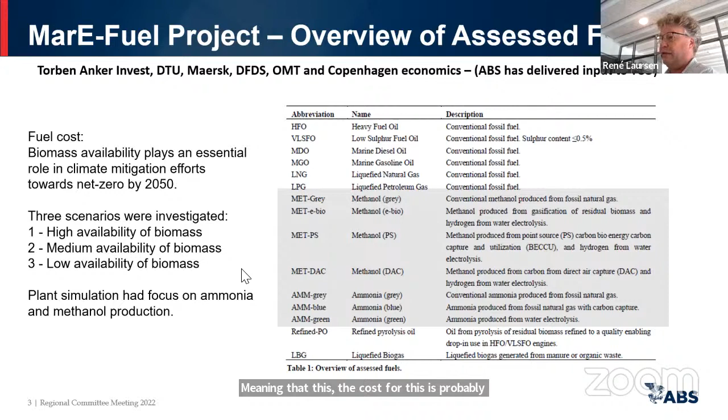Production of renewable energy was placed at 4 different locations in order to investigate how that impacts the fuel cost. Sizing of the renewable plant for production is very critical when it comes to renewable energy and the cost for that energy.

So therefore, there were some criteria that had to be in place in order to find a cheap and good location for production of renewable energy.

The ideal place comprises all of these parts: high wind resources, high solar resources, access to a port, access to fresh water, and a large area of land that doesn't cost much, because to produce sufficient energy for these fuels you need quite big areas of land. So it's important that these land areas are fairly cheap.

It was identified that 4 locations - in Chile, which has a big desert area close to the sea where all these facilities were in place, and also in southern Australia and in Western Africa. We also found wind maps and solar maps for those areas, and used those to establish an optimized design for renewable production.

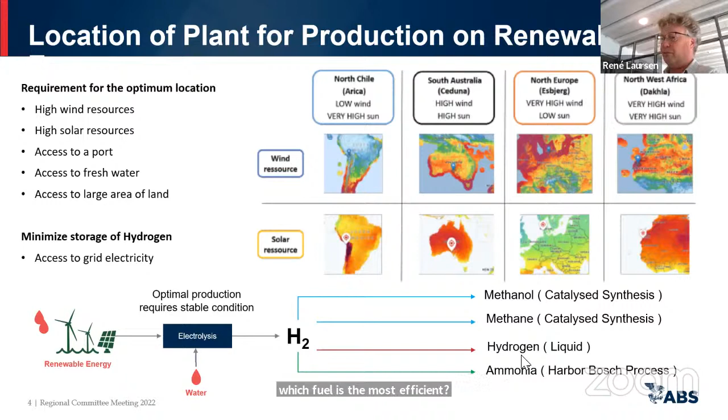Methanol and ammonia have a tendency to reduce in price as production scales up, and they are fairly dependent on the cost of electricity. The bigger the scale of electricity production, the lower the price of the fuel you will get.

So the expectation is that those fuels will rise in value over time. By 2050, it is estimated these fuels will be 2 to 3 times higher in price than ammonia and methanol type fuels. But over the full period, there's no chance that these new fuels will actually reach the same level as the fossil fuel.

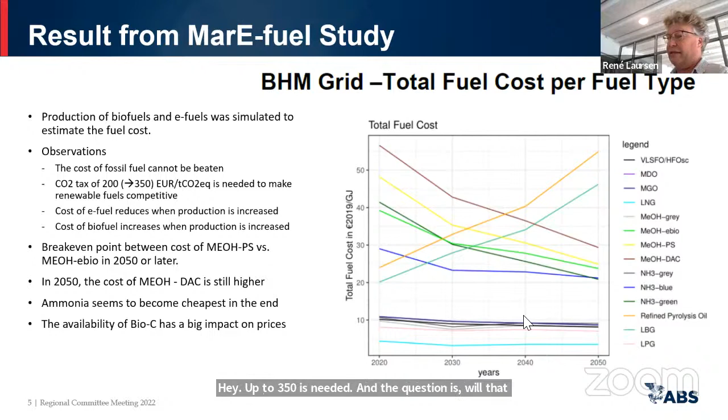It was found that a tax of a minimum 200 euro per ton of CO2 is needed in order to make those competitive. If you're looking at fuel to fuel competitiveness, up to 350 is needed. The question is, will that be a taxation that can be applied in the future? I don't know, it's a big question.

One thing is the fuel cost. Another thing is if you're having a ship operating on these new fuels, you will also need to do modification on the ship, and that has a cost impact also. So we looked at container ships, bulk carriers, different ship types to see what is the impact of installing this equipment, and then we make a total cost of ownership model for the ships to see what is the impact here.

Here we have the fossil fuels in the bottom, these are the straight line, and then we have biomethane, and we have ammonia and methanol going in this direction as we saw before. But it's still seen that there is a big deviation, even though we apply a taxation here of 25 euro per ton of CO2, there is actually a big gap between the fossil fuels and the cost for operating those ships. We need a taxation of around 300 euros per ton before these new fuels will be competitive, and this is simply because there is added cost on the ship to consider as well as the fuel cost.

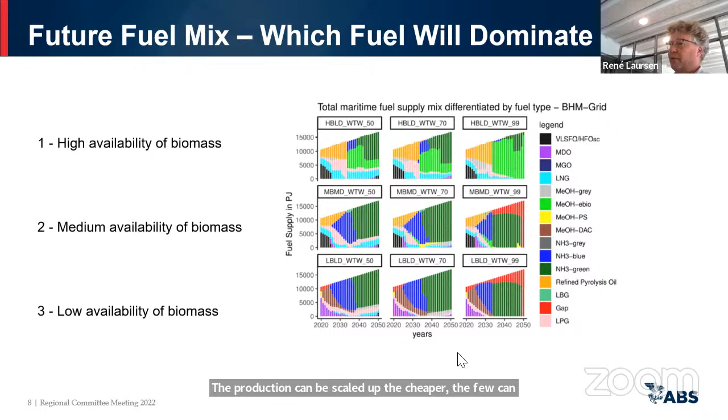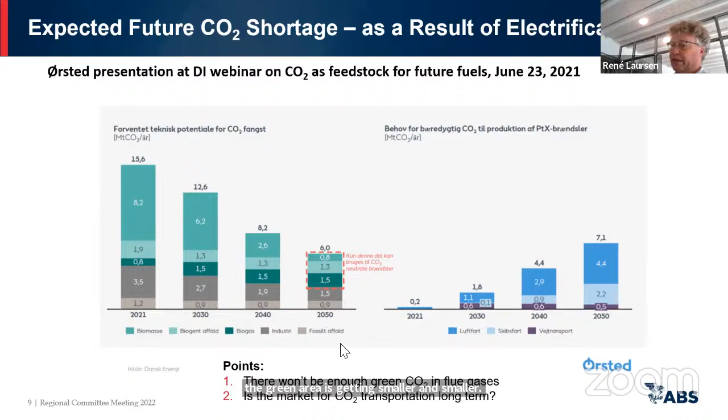Another indication here, this is from Ørsted. They have made an estimate on how much biomass and biocarbon there could be from carbon capture systems in the future. They believe very much in electrification, and believe that this is ramping up because it's the cheapest way to produce electricity, cheaper than using fossil fuel, from wind power and solar power. So we will not see any new power plant coming up using fossil fuel instead of renewable fuels. So they expect this will decline over time, and the amount of biocarbon will be less and less over time. You can see here the amount of biocarbon represented by the green area is getting smaller and smaller over time, also indicating that biomass will be a limited source for the future.

Another project also mentioned by Eduardo that we are participating in is making reports about the use of new fuels in shipping. We have so far completed one report about ammonia and one about biofuel. Those reports are available if you go to the EMSA site under publications, and then those reports can be downloaded. These are quite heavy reports, it's 300 to 400 pages with information about the use of ammonia in shipping.

What is covered in those reports is listed here on the left side: the availability of the fuel, the sustainability of how it's produced, the suitability where we're looking at engine and fuel cell technologies available in the market and how they can adapt those new fuels. Then we look at the total cost of ownership for different ship types. We also have a section about the regulation and what is needed to be changed in order to adapt those new types of fuel. And finally, we conclude with a risk assessment done for different ship types, both for ammonia and for biofuel.

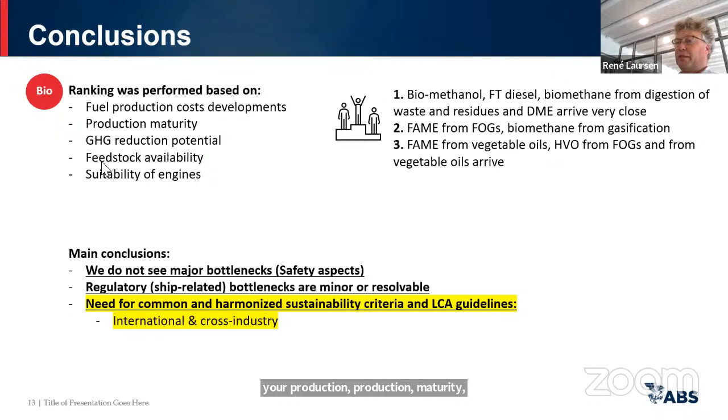We also ranked the different biofuels in order to see what makes most sense in shipping. Here we see that methanol also arrived on the top level together with Fischer-Tropsch diesel and biomethane. We compared it on these different elements: fuel production, production maturity, greenhouse gas potential, availability of feedstock, and suitability in engines and fuel cells.

The report about ammonia concluded that if you look at the announced production amount, today there's been produced 235 million tons of ammonia. And if you look at the announced production quantities, it's 133 million tons of ammonia expected in 2030, which is a significant scale up of production. This is simply the energy sector in Japan driving this uptake of new production facilities. The production methods for producing ammonia are well known - it's the Haber-Bosch process, which has been optimized over the last 40 years.

Electrolyzer is also known for turning electricity into renewable hydrogen that can be used for production. The unknown here is to scale it up to the quantity which is needed.

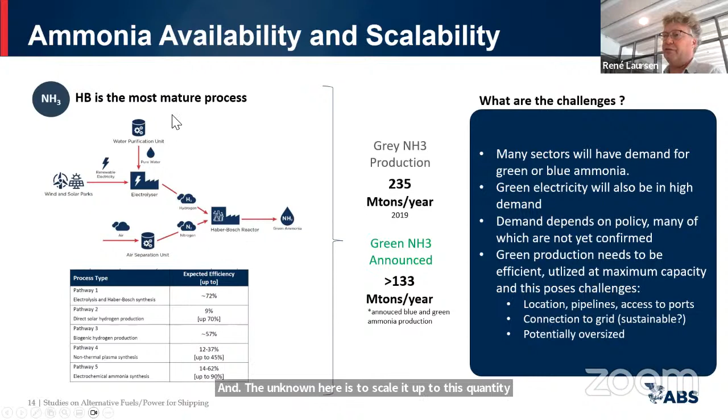Efficiency for producing ammonia is also quite high, up to 72%. And ammonia is a commodity which is well known worldwide.

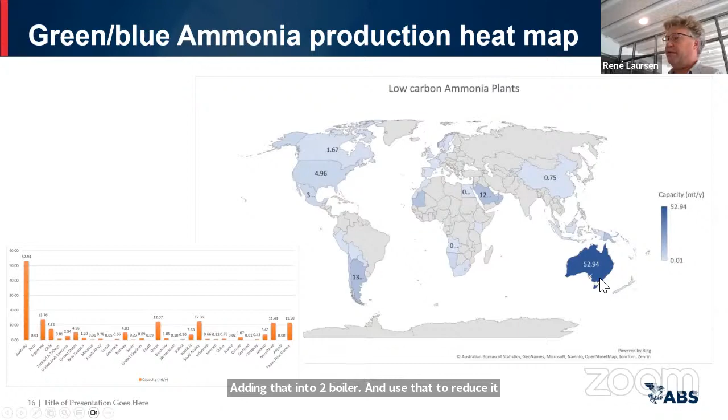Conclusion from the ammonia report: production is well established. It actually is a fine fuel.

There are issues with burning ammonia - you can have increased NOx, you can have N2O in the emissions, and that is a greenhouse gas. And the amount of pilot fuel for burning the ammonia is an unknown.

But it's well known in shipping. It has been carried in LPG carriers for more than 50 years. So it's easy to transport.

The big challenge to overcome is perhaps the toxicity of ammonia. We see, however, that all the new projects with ammonia in shipping are collecting ammonia vapor in case of leakage. So there's a very limited amount of vapor that is actually being sent out.

I think I will end with this. I have spent my 20 minutes here.

I don't know if we should take questions now or wait until the discussion panel. Okay, yes, because that way everyone will have a more overview of everything.

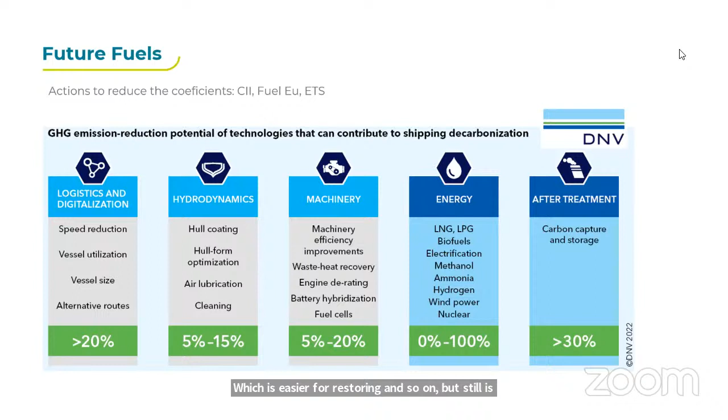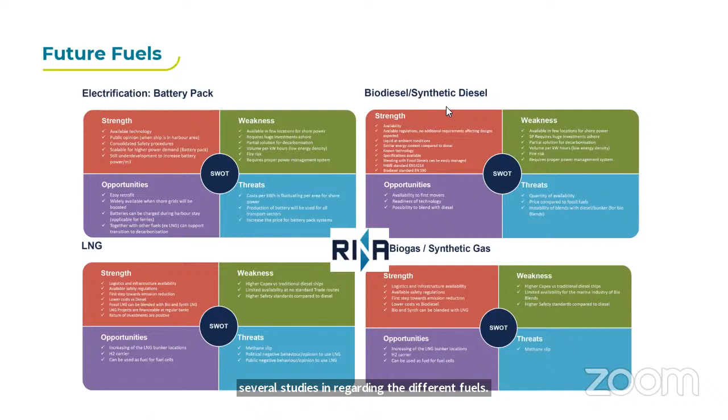As Rene has been showing, there are several studies regarding the different fuels. All of them have strengths and weaknesses. I'm not going to go into each of them, but I agree that nowadays what is more on the target, or in the line, is methanol and ammonia.

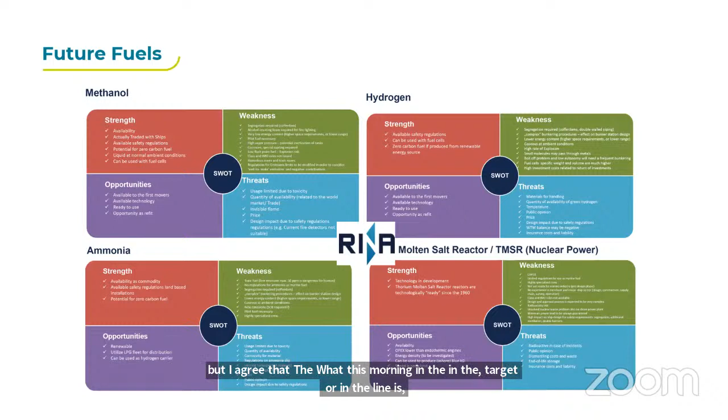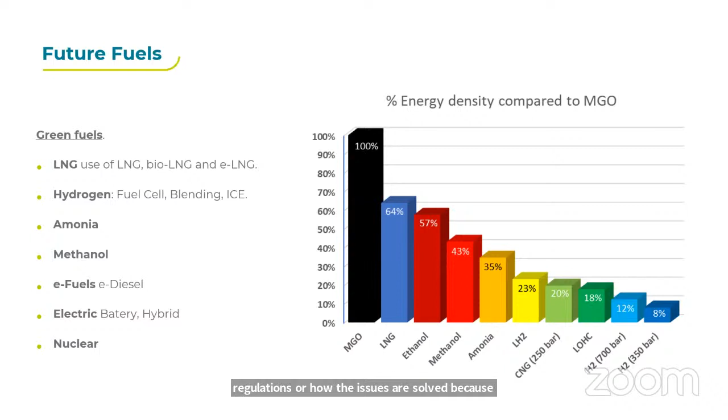From my part, as we are dealing with passenger vessels, I don't see ammonia at the moment. This will depend a lot on the systems or regulations on how the issues are solved, because we have some problems with venting lines of the fuel lines or fuel tanks, or when bunkering. There are still a lot of things to be addressed, mainly in the bunkering phase and also in the fueling. It would be easier if it's used for a fuel cell, because after bunkering, all the ammonia stays in the engine room, wherever it is. You don't need to move it around the vessel, and it will be easier to control. But at the moment, for passenger vessels, I see ammonia as difficult to use.

But well, we are also controlling the progress of these fuels. We are checking all of them, and when we are considering future fuels, we have to take into account several points. One of them, really important, apart from the price, is the energy density, because the more fuel weight, the more fuel space we need, the less we can transport. So the efficiency of the business itself is quite compromised. It depends on how it is handled.

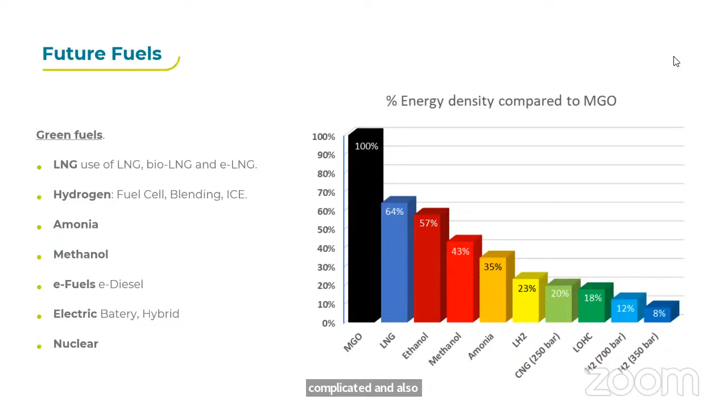Of course, hydrogen is very green, very nice, but the way of storing it on board is really difficult, even with cryogenic storage, which some vessels are already using, but it makes it quite complicated. Also the availability of liquid hydrogen is very low at the moment. So we keep watching all of them and checking all the aspects that impact the selection — not only the tank-to-wake part of the vessel, but including the well-to-tank, so the complete well-to-wake cycle.

This is one example of data obtained, made by Bureau Veritas, which I saw at a recent congress. So it seems that synthetic fuels could be a good solution for this situation. As we don't have enough biofuels, we will probably have to move into synthetic fuels.

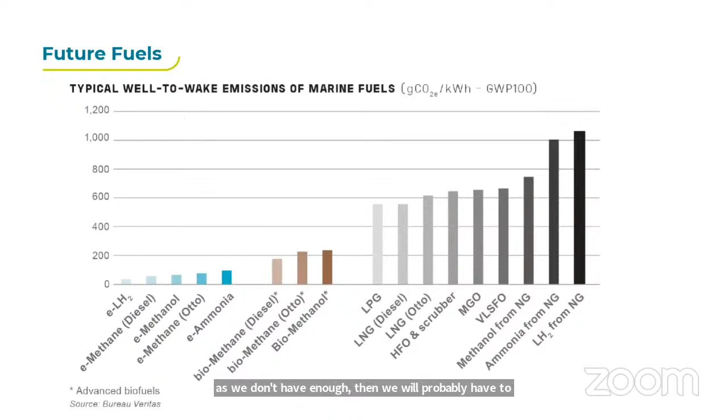Pablo? Yes, I'm back, yes okay. Yes, you're back. Yeah, sorry, the internet connection in the hotel isn't so good.

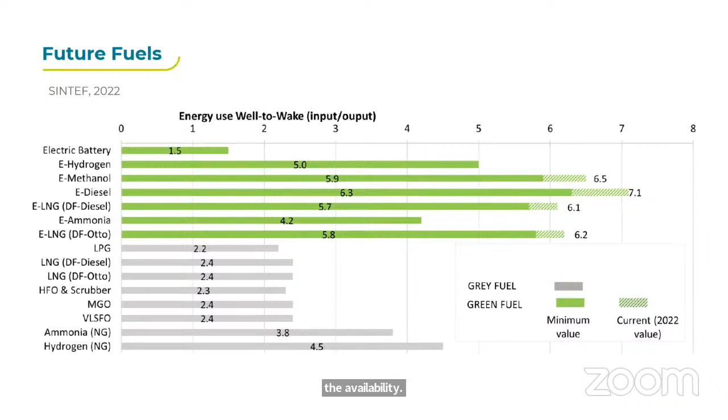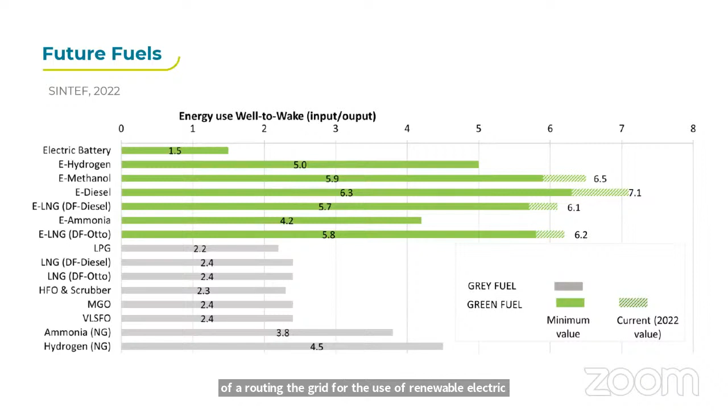But for any of these fuels, we will need much more electricity from renewables. If you inject the electricity directly into the grid, the process is much more efficient. So the problem will be the availability of renewable electricity. There is sense in using renewable electricity when there is overload in the grid. Then we can produce any of these fuels — we can produce green hydrogen for producing all of these fuels — but that probably will not be enough for all the electricity needed.

As we can see here, quite similar to what Rene has shown, for any of the synthetic fuels we will need green electricity and then carbon capture, and then we produce the fuel. Hydrogen doesn't need carbon capture, but in any case we will need green electricity — or maybe, if blue is admitted, then we can use natural gas, and the situation will be easier in terms of availability of green or blue electricity.

But we will compete with a lot of industries for these synthetic fuels, so the price will not be so good, and we will have to check which one is the most convenient.

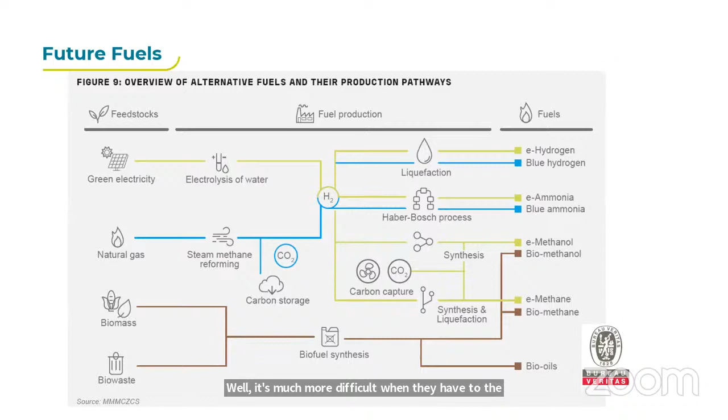This is the problem now — trying to know which will be the easiest to have, the one with real availability, and the one available in the area you are operating in. In our case it's easier because we always operate in the same area, but vessels doing tramp operation, it's much more difficult, because they have to move from one continent to another, and they need the same fuel everywhere, or at least compatible fuel.

Again, with the production of green electricity, this is the demand for the marine sector of energy. The production of green electricity at the moment is not enough for the power needed for the marine sector. We have to take into account that each kilowatt here means 5 kilowatts there, so we need 5 times of this. At the moment, the increase of renewable electricity needs to rise really a lot.

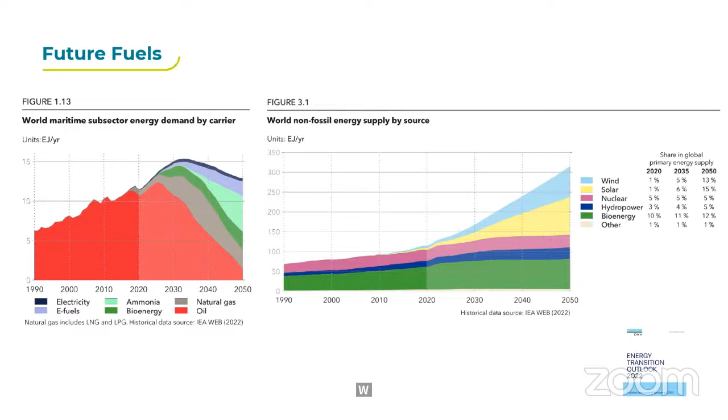But Pablo, please try to wrap up, because your time is up. Okay, I finished.

Okay, this is the impact. The conclusion for us at this moment is we are looking into all the fuels, all the solutions. We know the technical part will be there - whichever is the winner, the technical part will be solved. The problem, I think, will be availability and price.

The only line I see, if today we have to build a vessel, is to go into dual fuel with LNG, because LNG today is there, even being gray or black or fossil LNG, we are reducing emissions. Here it says 30%. We take into account methane slip, we go to 20, maybe 15. But we are reducing. If we use methanol, which is not green, we are not reducing emissions at all.

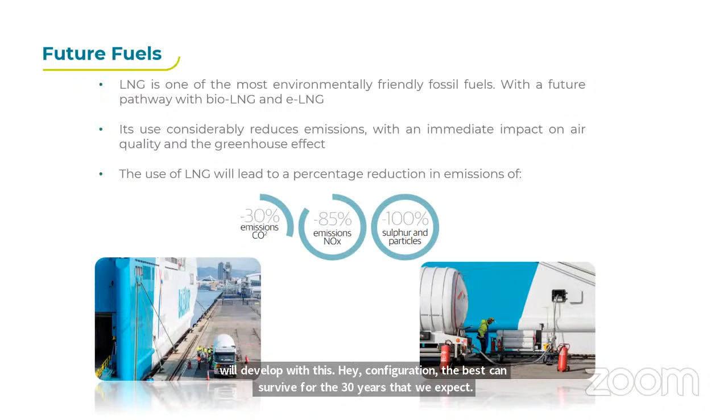So that's it from my part. Thank you so much, Pablo.

Very, very interesting. Now we are going to have a couple of companies, SMEs, that are trying to produce these fuels. So I'm going to present Johannes Bochdalofsky from South Africa and his company SeaH4. So Johannes?

Yeah, it's all happening, I just need to sort out the sharing and all of that. Good morning all, very interesting. I'd love to chat more with Rene on the backside of this.

SeaH4's concept is very much to provide the biomass to produce sufficient biogas to then get the bio-LNG going at scale. I can skip through most of this because it's been mentioned one way or another, but in essence, fuel efficiencies aren't sufficient to get us to carbon neutrality.

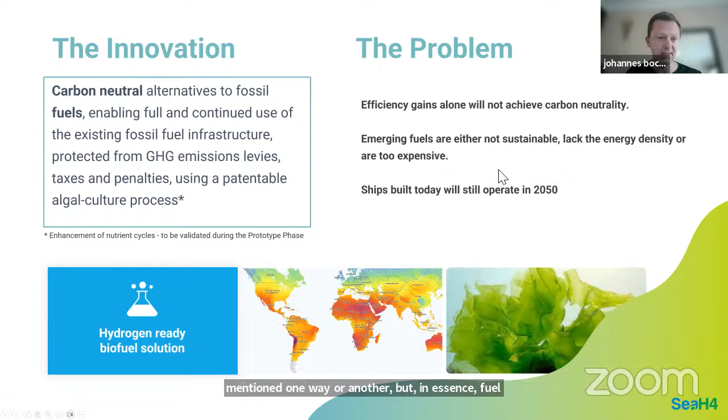Our idea is large-scale farming of ulva, that's a seaweed, along desert shores - not offshore, but land-based, however in desert areas, so that there is no impact in terms of competing with food as well as expensive land or other. It also means you're typically sitting in areas with high solar irradiation input.

If I refer back to the slide with the areas Rene showed, those are particularly all the coastal areas that were part of that, plus our home base, South Africa, which was missing in the slides shown for wind and solar capacity.

That biomass, that algae seaweed, is then merely converted into biogas and then upgraded into methane and CO2. In the first step, the CO2 will just be sold off to the food and beverage market, which at least here in Africa is starved for high-grade CO2. And the methane is turned into bio-LNG for bunker fuel.

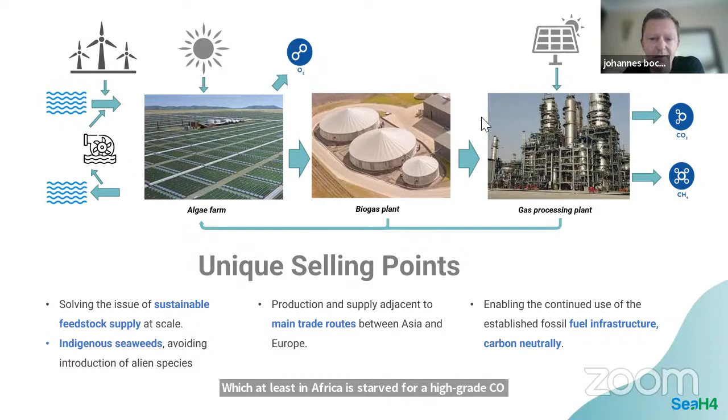I'll get into why that is a particularly scalable thing, and I think Rene can talk more about these things in depth. We believe the solution is ready to go in terms of infrastructure for distribution and consumption. It is scalable, it is blended in with the fossil LNG, which means the first kilogram we produce is useful. It's not in competition with food.

Now, it says ammonia is not in competition with food, but considering that ammonia is being used heavily as fertilizer around the world and Africa is experiencing a major fertilizer scarcity, it is in indirect competition with food.

Red on the map indicates the areas we have identified where we can set up, equating to around 18,000 kilometers of coast where we could scale to. It is all area with very low population density and basically no or low natural habitat value and no farming.

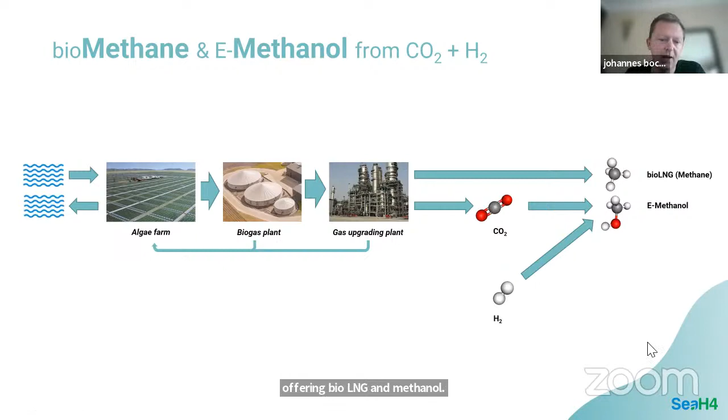Now, about the scalability, which has come up in both talks previously - an area equivalent to that of Lake Victoria would suffice to get two-thirds of the global shipping fleet's fuel demand satisfied. That would be at the cost of 3 months worth of subsidies into fossil fuels at the current rate - that would be the entire capex. So it is very much scalable.

And whilst Lake Victoria is big, you saw earlier where we can scale to, and it's just desert that we want to scale to, so the space is there. It's much more efficient than other biogas feedstocks, and is energy positive, unlike e-fuels.

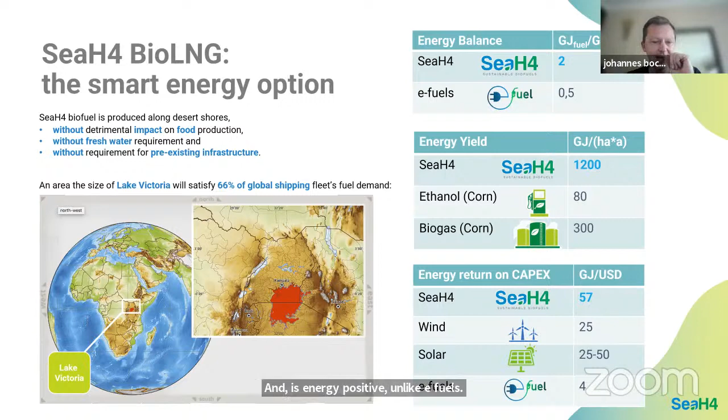Yeah, let's leave it there. We've recently been included in the IMO's Green Voyage 2050 as the national pilot program for South Africa for the decarbonization of shipping, and also had a whole lot of other programs that we've completed over the last 2 years.

And now we are looking at setting up a test farm - I'll still get to what that will look like. But in essence, if we get the test farm running this year, we are aiming to have 2 plants in full-scale production before the end of the decade. That would be 30,000 tons of fuel, which is not a major number in shipping, but the scalability is largely limited by available capex, so it can grow much faster too.

Yeah, here's a bit on the test farm. It is just a 500 square meter test farm, which is mostly the farming of the seaweed and the recycling of the feedstock from the biogas. South Africa already produces 10 to 20,000 tons of that particular seaweed we want to produce, so it's an established industry here.

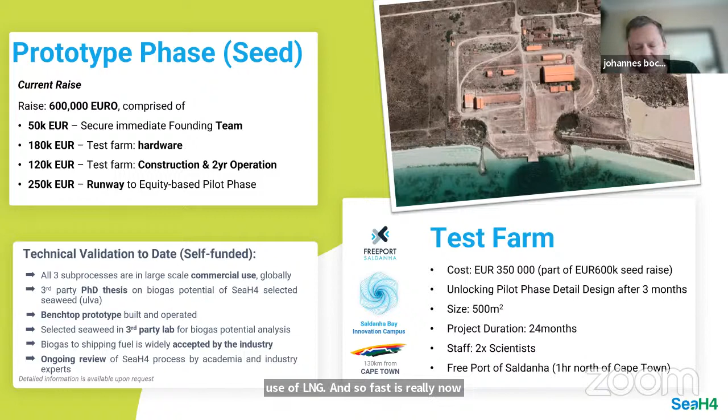We don't need to still research on that. Biogas as such is well resourced, researched and in use, and the same obviously goes for gas upgrading and the use of LNG. So for us, it's really now to prove how well all 3 technologies gel together, and that is us.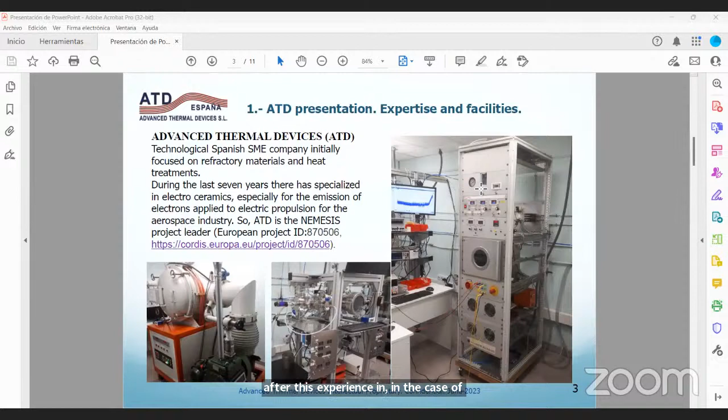After this experience in special materials, in the case of use of non-thermal plasma applications, we started last year 2 important projects, a national project, in order to translate this kind of materials and technology in the case of ammonia, not only in the cracking process, but even in the synthesis.

So the Hydran project is a complete ammonia chain implementation, from ammonia synthesis. It's not Haber-Bosch processes, because we have to downsize the synthesis plant in order to get production from 100 kilograms per day to 1 ton per day or 5 tons per day.

But the most important thing is to match the nature of renewable energy, that is intermittent operation, not continuous operation like Haber-Bosch. That implies a new catalyst generation reactor, and storage and logistics of the ammonia, and of course cracking on board.

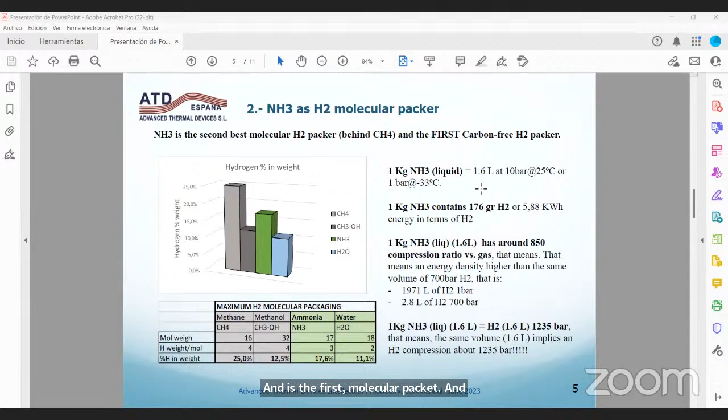Okay, the cracking we plan to implement by improving in two directions that we will see: catalyst, a new generation of catalyst, and to avoid thermal losses or reduce thermal losses that at the limit, I think...

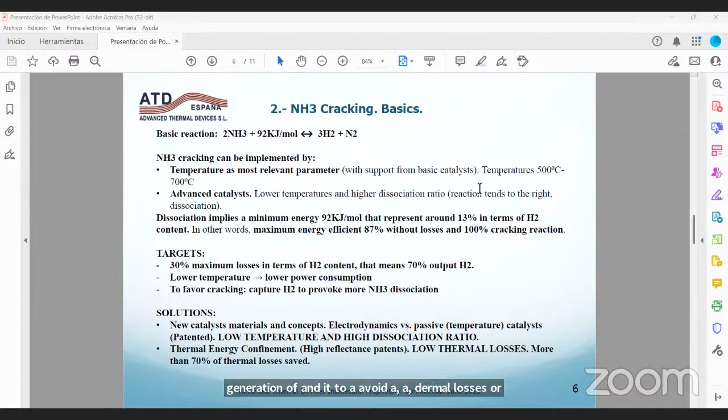How can we get this? The traditional concept of catalyst is not even new materials, but the concept is passive or based only on temperature reaction. But we plan to use not only thermal and new materials in catalyst, but even pulse bias control in the material, in order to guarantee a better reaction with the gas, to get the dissociation.

The origin of this concept is the non-thermal plasma use of ammonia that we planned 2 years ago and presented last year at MIT and at the International Electric Propulsion Conference in the US. You can see the real cases of use of ammonia fuel in the case of electric propulsion and neutralizer.

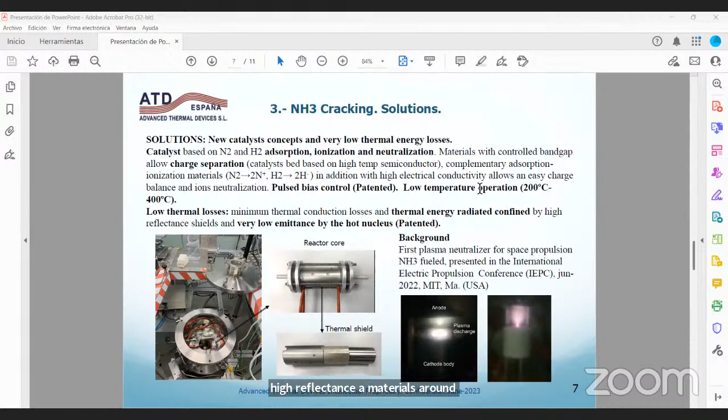The same concept is translated not into direct non-thermal plasma use, but biased catalyst, in this case combining temperature and bias or electric power in a little reactor, combined with a new concept of very low thermal losses, that is the main or first loss in the cracking process. This uses very low emittance materials in the hot nucleus, combined with high reflectance materials around the nucleus in order to avoid all the thermal losses.

Okay, then we have to extract the hydrogen from the mix of nitrogen and hydrogen, and we are developing a new concept that is in the first stage of development in the world, that is not to use traditional mechanical pumping or compressor, but what we call a proton membrane. That is the concept in order to separate hydrogen using a high conductive proton membrane.

And in this case, we have very, very pure hydrogen, and not only this feature, but even a very good cracking step of the reaction in order to get more hydrogen, because we are extracting hydrogen from the reactor at the same time. Therefore, the system acts in two directions: improving the cracking process, and...

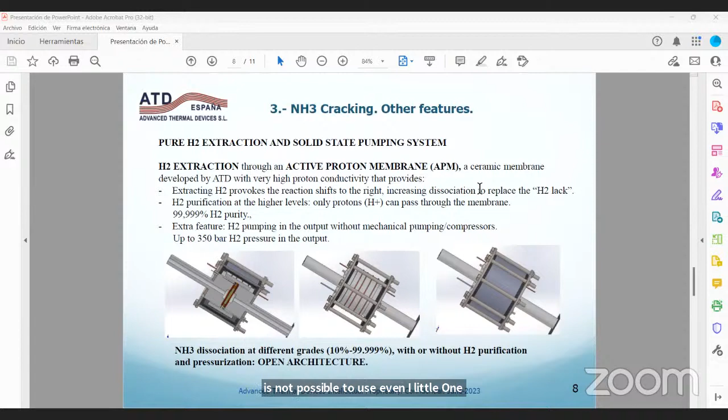...getting very pure hydrogen just for use in PEM or traditional PEM fuel cells, because the membrane in PEM fuel cells, like Nafion, is poisoned with ammonia and is not possible to use. Even a little content of ammonia, 1 or 10 parts per million, is enough to ruin the fuel cells.

Okay, this is the complete schema that we plan to use the cracker, not only for complete cracking of the ammonia, but even to control the rate of dissociation from 10% or 15%, that is typical in the use of direct fuel system in the propulsion, that is updated for use of ammonia directly.

In the case of the use of hydrogen plus nitrogen, it's possible to capture all ammonia not reacting, not dissociated, with some capture system in order to guarantee there is no ammonia in the output. But the complete closed and secure system is to avoid all the ammonia that is not reacting, getting only hydrogen for burning in motor, or for use in PEM fuel cell or solid oxide cells. That is the new generation of electric generation from hydrogen or ammonia with higher efficiency.

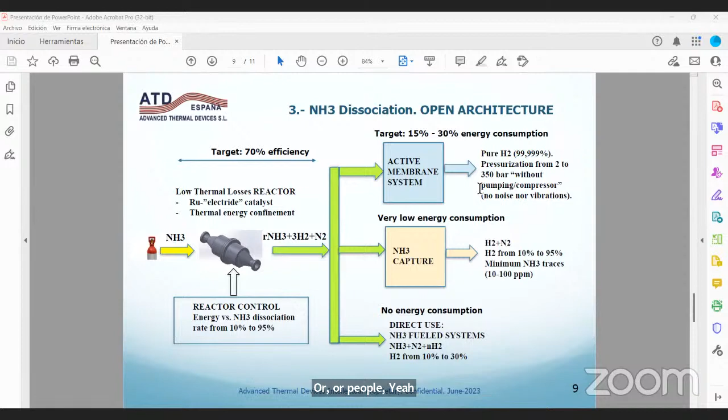In this case, I understand, Pablo, the concern about passengers being close to ammonia burning, but it's not easy to sleep with this potential danger. But in complete closed systems, like a refrigerator, you have refrigerators with ammonia and there is no problem. Probably in the future all people can sleep without headaches. Please, Fabián, wrap up because your time is off.